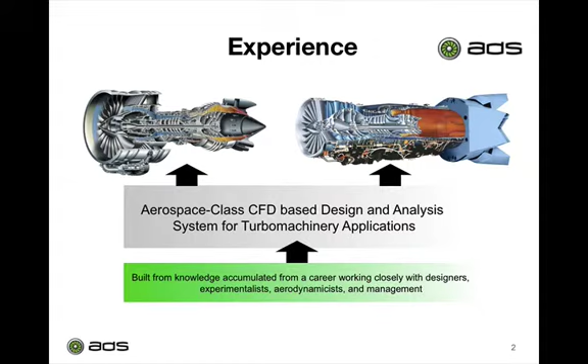Really, the only way to build aerospace class CFD is over a long period of time, developing knowledge, accumulating knowledge over many design cycles, working closely with designers, experimentalists, and aerodynamicists to make sure that this building block CFD was validated to physics. After 30 years at Pratt & Whitney, Bob retired in 2003 to strike out on his own. But having done that, he took with him certain values that we thought were requirements for really creating a CFD system that you could count on for turbomachinery analysis.

The first value is to be independent, not only as individuals doing the analysis, but to make sure that from a predictive standpoint, the CFD was without bias. And to do that, it really means that the software has to be validated to be true to physics and not calibrated to engine data. Now, this is very difficult because CFD in and of itself is a prediction. So how do you go about the validation process? The only way you can do that is by spending countless hours understanding the root cause of differences between CFD and engine data.

And the first thing to do is really throw out all of your biases and say, well, there are many sources of error when we do a comparison between CFD and data. And not all of them are CFD related or experimental data related. There are many sources of error, such as user bias, incorrect boundary conditions, or incorrect geometries, including differences between where experimental data is taken and how CFD data is taken. But the only way to really understand this is to have the experience doing it. And we have that experience because there are many scars over a career of trying to validate software.

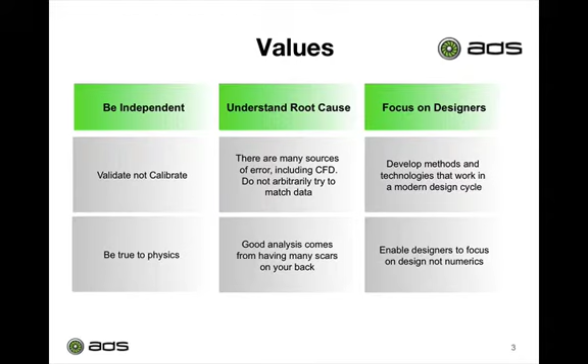Now I want to talk about where our software sits within the turbomachinery design cycle. Here we have a flow chart of a typical design cycle where it begins with a mean line and streamline analysis. Here, a designer develops an idea for what the number of airfoils, the velocity triangle, and the inlet and exit radius of each row will be. They will then bring it into our software using those parameters to generate 2D airfoil sections that match those parameters, perform CFD analysis and a 2D simulation in order to eliminate as many candidates as quickly as possible.

And then as you build confidence in those designs, you can stack them into 3D to form a single row analysis. You can then build more confidence by attaching more stages together. And then finally, to get the highest level of confidence, you run complete unsteady analysis. This loop I call the turbomachinery tight loop. This tight loop is the major gate when we talk about the overall design cycle time.

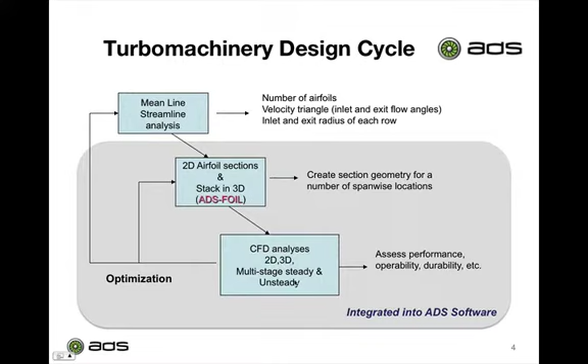What ADS focuses on is reducing the overall time it takes to go through one of these loops. And one of these loops includes generating the airfoils, pre-processing or generating a good mesh for this analysis, running it, and then being able to analyze those results and determine what your next step is really quickly. Okay.

So what is the software that we use to enable this turbomachinery design cycle? The first is ADS foil. That's our parameterized airfoil design tool that can be used within the design cycle. Next is our automated structured mesh generator. That's Code Wand. It's specifically for turbomachinery blading applications used during the aero design process.

Next is our aerospace class flow solver. This is our validated software, Code Leo, that is capable of handling both structured and unstructured meshes. And I'll go into a little bit about unstructured meshes later in the talk. Next is our graphical user interface, the ADS Workbench. This helps simplify and automate the design and analysis process.

Next are two services or enabling technologies. One is Cloud Leo, which allows you to get on-demand compute infrastructure from industry leaders such as Amazon Web Services. Next is our on-demand pricing model, which allows you to pay only for the solver hours you use.

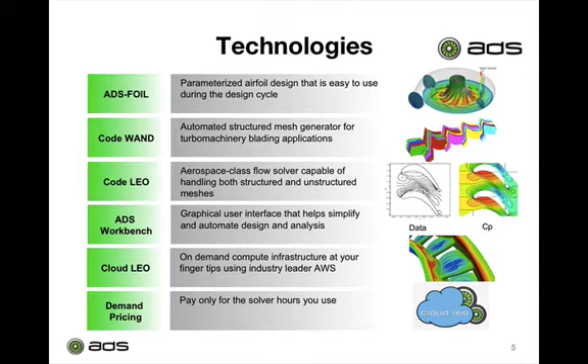So now I'm going to take a little time to go through each of the software or technologies one by one. First, I want to talk about one of the most important parts to the ADS software suite, which is Code Wand. And that's our automated high-quality structured mesh generator. It's specific to the aero design process, and it's able to automate the process of generating multi-block OHHH type meshes for both axial and radial machines with splitters.

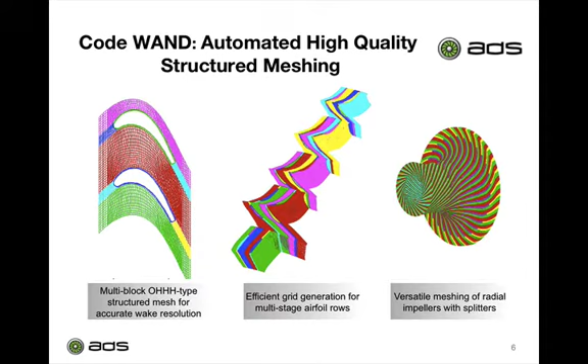You can then take those blocks and then create efficient multi-stage simulations also within Code Wand. Because this is all automated, that process really simplifies the tight loop for the pre-processing step.

Next is our aerospace class flow solver, Code Leo. All of the technologies that have been selected or implemented within Code Leo have been implemented specifically because they are best at matching physics. First, it's a density-based code which employs the cell vertex scheme. It uses the finite volume approximation method, which means it uses distribution formulas for obtaining the second derivatives and upwind bias due to convection and propagation.

Also, Code Leo can handle 4 types of mesh elements: tets, pyramids, prisms, as well as the structured hex elements. It's an explicit time marching solver. It blends second and fourth order smoothing to reduce oscillations in the flow field due to shocks and transient flow. For convergence acceleration on structured meshes, we use the multi-grid method. And for unstructured meshes, we use our proprietary residual propagation method.

We are able to handle time-resolved flow simulations using the dual time-stepping method. And for low-speed flow problems, we use the preconditioning method. Code Leo also implements a heat conduction module and a nonlinear harmonic balance module.

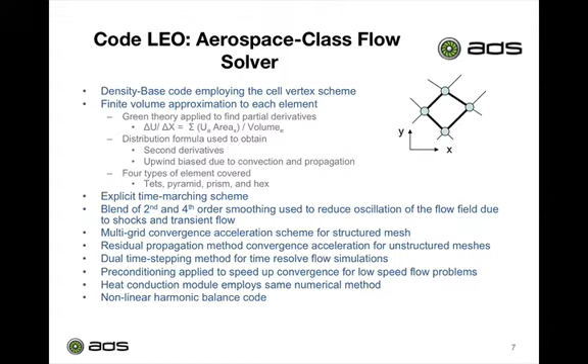Here are a few of the advantages of Code Leo. First off, it's highly robust, meaning for many types of meshes, it can converge quite readily. Second, it has a low memory footprint. Because of the cell vertex scheme, the methodology is second order accurate even on non-uniform meshes, which means that it's highly tolerant to skewed meshes. This is important when we're talking about unstructured meshes.

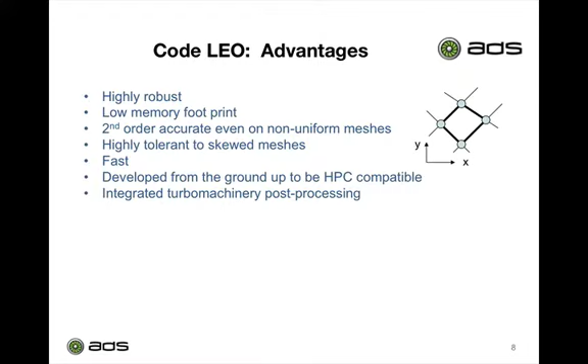Code Leo is fast and it's been developed from the ground up to be HPC compatible. One of the biggest advantages of Code Leo, I think, is the integrated turbomachinery post-processing, which helps, again, speed up that tight loop by enabling you to get the data that you need as quickly as possible.

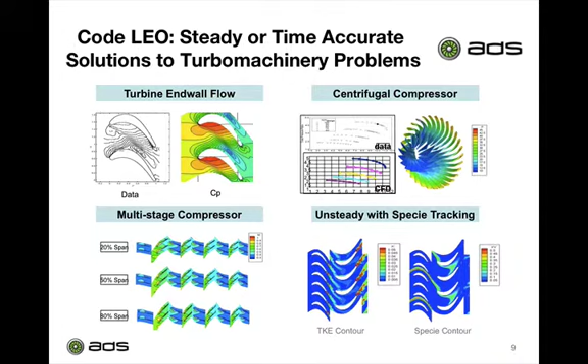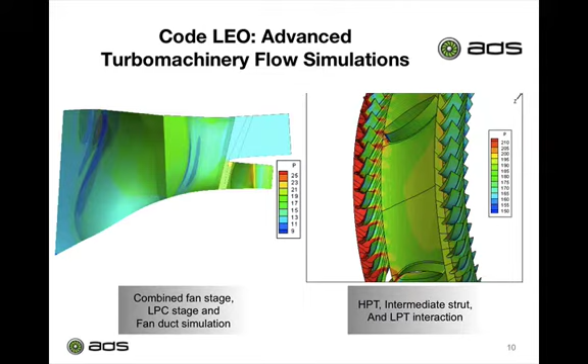Code Leo and Code Wand can also be implemented together to do more advanced turbomachinery flow simulations, such as a combined fan, LPC, and bypass duct simulation. We call this a split flow simulation. Another advanced turbomachinery flow simulation would be HPT and LPT interaction with an intermediate strut.

As I mentioned before, Code Leo also supports unstructured meshes. Really, we view unstructured meshes as being a requirement when we get to more complex geometries later in the design cycle. We know that because of these complex geometries, a big portion of the time is consumed generating a structured mesh. And that's why it's important for us to be able to solve unstructured meshes. We have a partnership with Pointwise, and we're able to dump their T-Rex type meshes directly to our Code Leo restart format.

Because of the cell vertex scheme and the fact that it's second order accurate even on these really highly skewed meshes, we can provide really robust solutions on unstructured meshes.

Okay. Some applications of Code Leo in unstructured meshing would be for analysis of an airplane body or a rotating propeller. Some turbomachinery specific applications would be in the analysis, conjugate analysis of a high pressure turbine first vane. In this case, what you're seeing is a high pressure turbine vane with 648 fully resolved cooling holes. This was done with an unstructured mesh generator Pointwise.

And if we had tried to do this with a structured mesh generator, it would take even longer to generate the mesh compared to even running one simulation of it. Another application of unstructured meshes would be coupling, for example, an unstructured volute to a structured centrifugal compressor stage.

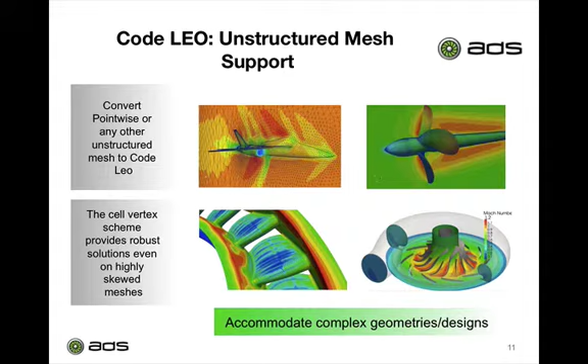The next piece of software that I want to talk about is the ADS Workbench. This is our user interface. It has 5 major purposes. The first is to help you understand the software quickly by helping you create cases with a case generation wizard. It has integrated help and cheat sheets.

Second, it can automate the post-processing by implementing 2D and comparative charting of the integrated Code Leo output, turbomachinery output. The ADS Workbench and actually our software is able to generate output files that are compatible with ParaView, Tecplot, and FieldView. Another important feature of the ADS Workbench is the ability to manage resources.

For those of you who don't have an IT department who can implement a queuing and batching system, the ADS Workbench enables a very rudimentary queuing and batching system which is able to monitor your compute and license utilization and make sure that if you have a large number of simulations that you want run, that you don't have to wait for the completion of one before issuing the next one. The ADS Workbench will monitor when licenses and hardware become available and will issue simulations that fit within that utilization.

Another capability of the ADS Workbench is for case management. With the CFD simulations, there's a lot of data that's generated, and the ADS Workbench kind of organizes that for you and enables you to search for various pieces of data all within one case or one simulation or one project.

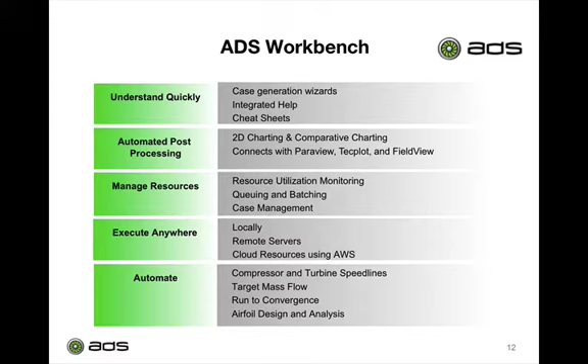Now I want to show you an example of how the ADS Workbench can help you generate those speed lines in the output. So not only does the ADS Workbench, in the process of generating a speed line, run the cases for you, but with so many cases being run, the big problem is actually being able to analyze that data quickly. And the speedline generator will create a report which gathers all that data so that you can view that quickly. Here I have an example of a 4-stage axial compressor.

This axial compressor is executed from choke to stall. A number of cases will be generated over a time period where the ADS Workbench will see what the first iteration of cases look like and then slowly increment towards stall, towards surge, so that you can get a good idea of what the actual range of the compressor is.

Once it's done, it will generate this plot file. The first two plots, which are the total pressure ratio versus corrected flow and total efficiency versus corrected flow, give you an idea of the performance of the machine. Okay.

Additionally, the total efficiency versus corrected flow has a little convergence tail, which enables you to see how credible each of the simulations are. Anything with a long tail means that it had trouble converging over some number of iterations and may be in the process of dying in this case.

Okay, so now that you know the overall performance of the machine, the big question becomes, how can I improve it, right? And that's what the other plots are. When we talk about rotor efficiency versus overall efficiency, right? And then also when we talk about the loss buckets per row. And what we plot here are each of the losses for each of the simulations as a function of flow.

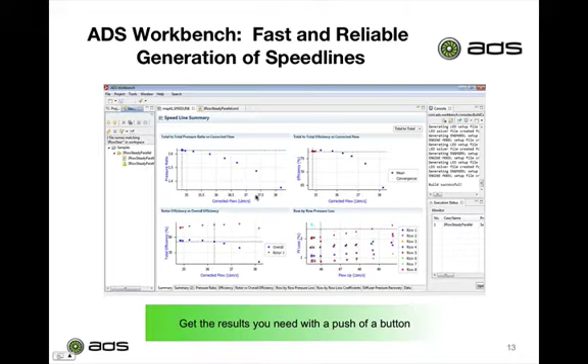And what we see quickly is, if we look, we see an outlier row, which is row 7. But also more difficult to see is another outlier row, which is row 5. So we know very quickly that we can target row 5 and row 7 as the limiters for the range of this compressor. And that really is the power of the speedline generator. You get all these results with a push of a button, and you can get it overnight.

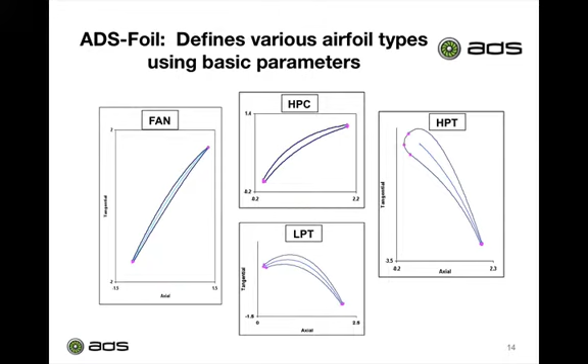Now I'm going to talk about ADS foil, which allows you to use your basic parameters to define various airfoil types. For example, you can develop fan blades, high pressure compressor blades, low pressure turbine blades, or high pressure turbine blades. You can also use the ADS foil to define radial machines by defining a tip and hub section along a camber line.

The real power of ADS foil really comes into play when you see it integrated with the workbench. Within the workbench, it has a user interface to enable you to see in real time how the basic parameters affect the shape of the airfoil. Okay, with a click of a button, you can quickly generate a mesh and simulate it all within a couple of minutes. At the end of the simulation, a loading plot will show up, and you can quickly analyze the loading of the airfoil to determine how you want to change the shape. You can iterate in this design cycle very quickly, and that really is the power of the ADS foil generator.

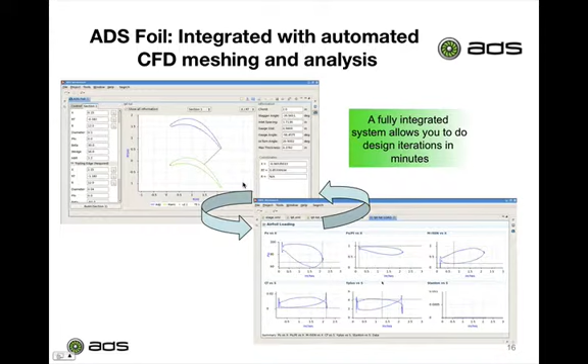So now I want to talk about some of our enabling technologies. The first is our unlimited compute capacity on demand service, which is called Cloud Leo. A lot of people do not have the infrastructure in place to power, to cool, to manage a large cluster. And with Cloud Leo, it really enables a small company or any company to really get capacity on demand without having the burden of having to store or own all of that equipment.

It's built on top of a secure architecture. We use class-leading infrastructure from Amazon. Amazon is one of the largest online retailers. I'm sure everyone has heard of them. They process billions of dollars in transactions every day. So their main purpose is security. We build on top of their secure architecture our own levels of security.

First, all cases are set up locally, meaning only the mesh is actually transferred over the cloud for execution. That mesh is transferred securely using 256-bit encryption. And then once it is executed, it will be monitored. And then once completed, all the data will be transferred back, again using 256-bit encryption. And the cloud infrastructure will be wiped clean and deleted. So nothing is left resident on the cloud. None of your data is left resident on the cloud.

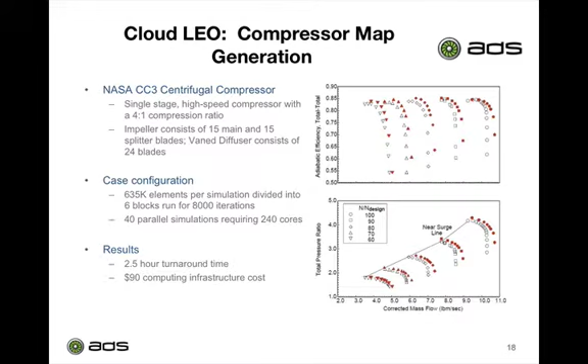Another very interesting use case for the cloud is when we talk about unstructured meshes. Unstructured meshes have this notoriety because typically, for a level of granularity compared to a structured mesh, you need about 3 times the number of elements. Okay, meaning that the overall memory utilization, the overall turnaround time for unstructured meshes is much larger. But the advantage of unstructured meshes is pretty evident in the fact that the mesh generation process can be automated, and you can remove part of the man-in-the-middle issues.

So what we have here is a dense unstructured volute mesh, which consists of 6 million elements. We partitioned this mesh into 16 blocks and ran it for 20,000 iterations. It completed in about 10 hours and cost us about $20 in infrastructure. The really interesting thing about unstructured meshes is we can continue to partition it from 16 blocks into 64 blocks or 128 blocks. And really that will reduce our turnaround time on a linear scale.

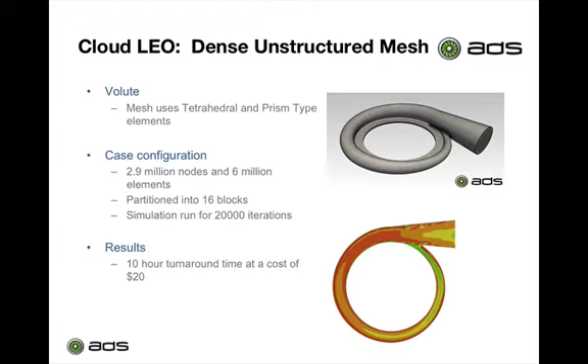What's also interesting is that there's a possibility that the overall infrastructure cost will not increase or actually decrease because of improved utilization of the cloud infrastructure. Okay, so it's really interesting now. You can spend the same amount of money, and now you can define what your turnaround time is going to be. Okay.

Another very important use case of the cloud is for large-scale unsteady analysis or full wheel analysis. A lot of people are turned off from running full wheel analysis, even though it has the highest level of accuracy in a RANS simulation. It simply takes too long and requires too many processors, right? But with the cloud, it really enables you to call up the number of processors that you need in order to run one of these simulations.

In this example, we have the Notre Dame high lift turbine, which is a 1.5 stage turbine and is made up of 165 passages. We split it up into 1/5 of a full wheel, but analyzed it for 1 full revolution. In this case, that was 10,500 time steps at 20 iterations per time step. Compared to a steady simulation, this is about 200,000 iterations in total.

This configuration was made up of 10.6 million elements and was partitioned into 160 blocks. Again, normally we wouldn't be able to run this case. But with the cloud, we're able to call up those 160 cores and turn around the simulation in under a day.

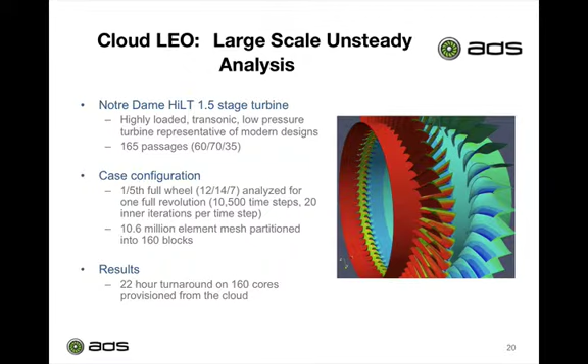So now I want to talk about on-demand pricing. With the cloud, with this on-demand hardware, it really doesn't make much sense to have the on-demand hardware without an appropriate software model. And ADS is not blind to that. We've implemented this metered pricing approach that enables you to pay only for the simulation hours you use to go along with the Cloud Leo infrastructure. So I want to go through some of the highlights of the metered pricing approach.

First, the metered pricing approach works both on your local computers and on the cloud. Okay, so you can meter all of your simulations. Second, any simulation under 2 minutes is free of charge. And that is typically any simulation that is incorrectly configured, or 2D simulations, for example, when you're doing the section analysis during the fast design loop.

Okay. With on-demand pricing, there is no limit to the number of concurrent simulations you run. Okay, there's no job limits. There's also no limitation to the amount of parallelization you do. So really, with this, you have the ability to determine what your turnaround time is going to be. Okay. Additionally, you can share licenses amongst your team. And again, simulations are charged per solver hour.

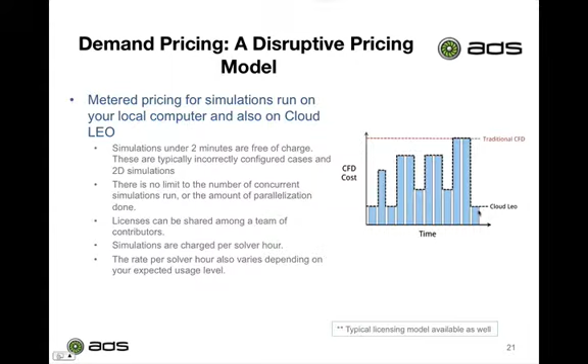I want to take a little time to acknowledge our supporters. We've been very lucky to have received 2 SBIR Phase 2 awards from the U.S. Air Force Research Laboratory to develop advanced turbomachinery applications for CFD. Our first SBIR Phase 2 award was to develop an advanced conjugate heat transfer capability for cooled turbine applications. And we are currently working on another Phase 2 award to develop a fluid structure interaction module for high cycle fatigue analysis.